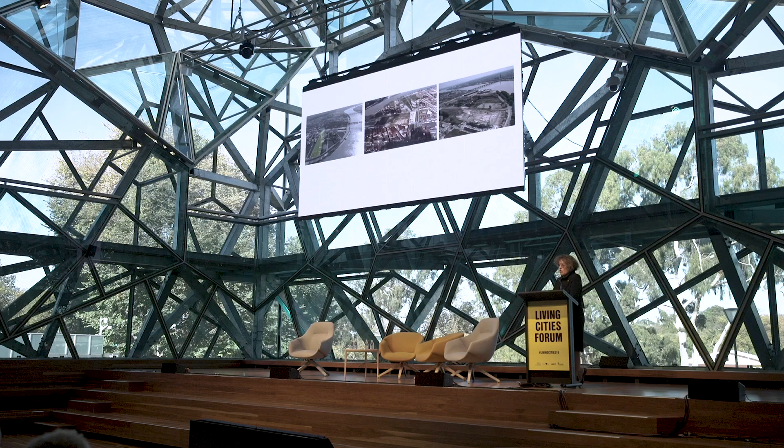A landscape project, studies and construction need approximately 5 to 8 years, so when it's going out, it's just the beginning of being a teenager. I will present 3 examples.

The first one is in Bordeaux, Botanical Garden. It's on the left side of the Garonne, in front of the very famous 18th century facade, UNESCO protected. As you can see, it's a factory district, very poor. It's supposed to be approximately 25 hectares of new urban development.

That's a gap, because scale in landscape is a very important scope. To introduce diversity in a small piece, a kind of pocket for landscape, was a challenge. So the way you bring the elements together authorizes or doesn't authorize what could happen.

10 years later, as I explained, this is the first piece of the urban development. You can see that the way we brought it together in 2 hectares was quite successful, because at the beginning that piece was a basin, and at the end it becomes a lake in the center of the city.

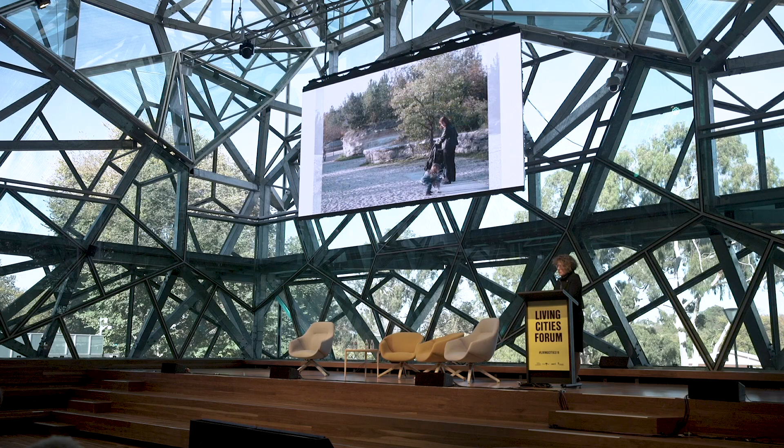Such a proposal is possible because it's a facility. A botanical garden is a facility for learning. I'm not sure you can do that in a regular public space.

It means you have a team of gardeners who explain to the people what happened. At the same time, as a way to organize spaces, it's an opportunity for young students, because on both sides you have campus, university campus, so they can engage with the place and have encounters and specific playgrounds.

So it means it's not only a place for children or just for rest, it's a place to invest in for regular time and everyday life, and even for animals you're not used to seeing in the heart of a city.

The second project is 25 hectares, on the same mine land. Here you see vertical mine pits, meaning the material isn't normally sold. It's a poor material, just made into deposits vertically after the coal mining. So a poor material, but open to air and to light.

The cyanobacteria do the job and introduce plants year by year. And due to the specific situation with sun reflection, you can find here in the north of France Mediterranean vegetation because of that specific reflection of the sun. This was the place chosen to put the new Louvre Museum, a new installation.

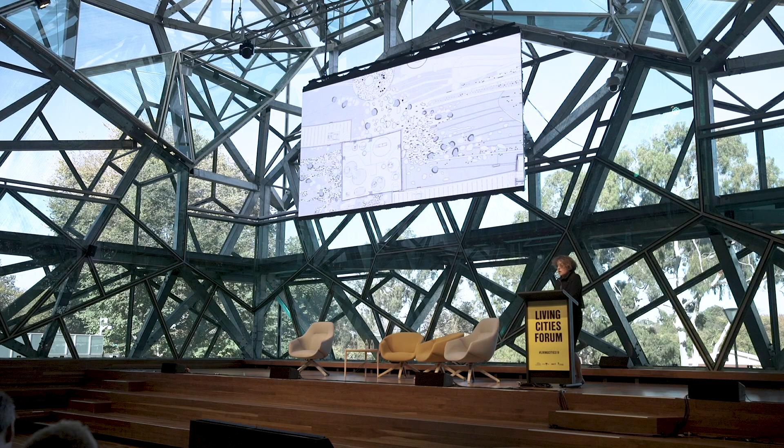So the building was not expected to be the main piece. The building with the park are just a transition, bringing the people from abroad or from the districts through the landscape, through the lobby, to the galleries and to the piece of arts. It means all the system is a traveling system, bringing the visitors through the timeline from environment, architecture, and then the goal from the facility is a piece of art coming from everywhere in the world.

You can see behind the mound of silt, transforming on the earthwork of the limit, that it's 2012 at the opening. You can see, step by step, the cyanobacteria do the job and transform, linked to the air, linked to the humidity, the earth into something vegetal. So just like a regular life on the earth, on our planet Earth.

August 2014, it was very rainy and very hot, and the wall became suddenly a garden, a vertical garden. All that spontaneously, without any seeds, just putting the material in the air and in the humidity.

Under the sun. The second subject is when you have mine exploitation, the underground is very fragile because you have a lot of holes, and it was expected from us that we keep all rainwater on the site. The slope from west to east is approximately 4%, so it was not easy to put the building in the center of the plot and keep the water in place, just to engage the plants' process.

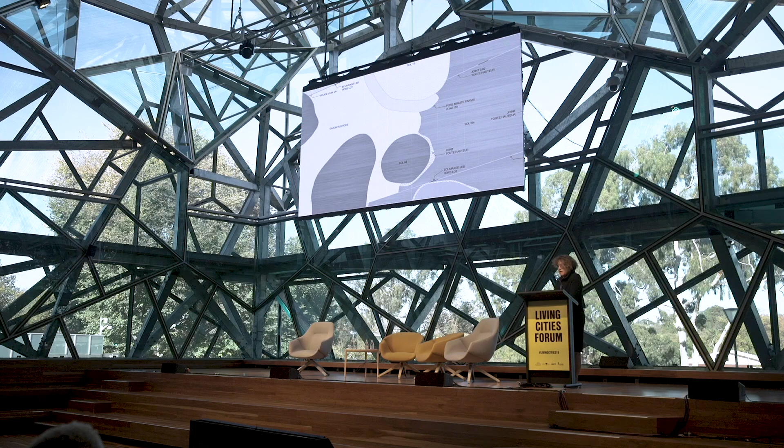So the only way we found to do it is to mix as much as possible mineral and vegetal, to catch the water with holes, to open the soil with holes where the plants work with the cyanobacteria transforming to mosses, and then to larger plants like shrubs and trees. All that is very precisely drawn with detail, linked to the slope work, and especially to the mix between mineral and vegetal.

When you do concrete on the plaza, it's quite poor material, and because concrete is alive and it's moving, you need to make a lot of recessed joints. And it was a way I gave arguments to the engineer, because a lot of engineers said, okay, it's not possible, just prove it. And proving something that doesn't exist is difficult, so you just need to prove it with technology.

And the only way we found to introduce spontaneous vegetation is with a recessed joint, more or less large. So the smallest one is 2 centimeters, 1 centimeter, up to 20 centimeters, the best nest for spontaneous mosses and other annual plants.

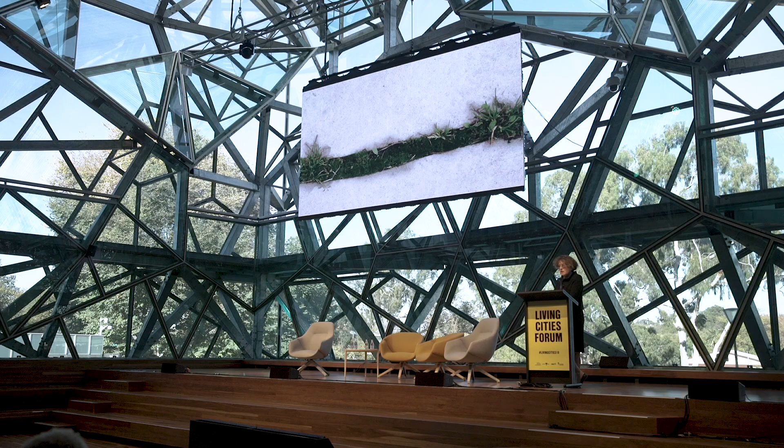So by sure, all that is spontaneous, so it can come or can be different, linked to the seeds, brought by the birds, and linked to the season, more or less rain, more or less heat. And it's a difficult negotiation with the cleaner, because if you use very hard material to clean the concrete, by sure there's no place for life and for spontaneous seeds. So it's a continual negotiation with uses and with life, like everywhere in a city.

That project is very powerful, showing the possible link between architecture, inside and outside. The architects are Japanese, so maybe they are much more trained to have a smooth link. And we worked very delicately together to make just one unique concept for both building and landscape.

One entrance coming from the station. The green canopy used to catch the water and to make protection against bad cars coming in, because it was a very, very important request to protect the building. The facade is fragile, it's glass, aluminum, against attentats.

It was 2005, so what happened further was not expected, but at that time, by sure, we didn't want, with SANAA, to have a lot of plots, because it makes everything very bizarre, much more like a jail. So we used that small earthwork to protect, again, against the bad behavior of attentats, to use that for spontaneous benches, and to catch all rainwater coming with the slope. So 3 functions for one piece of land, and it works quite well because of spontaneous appropriation.

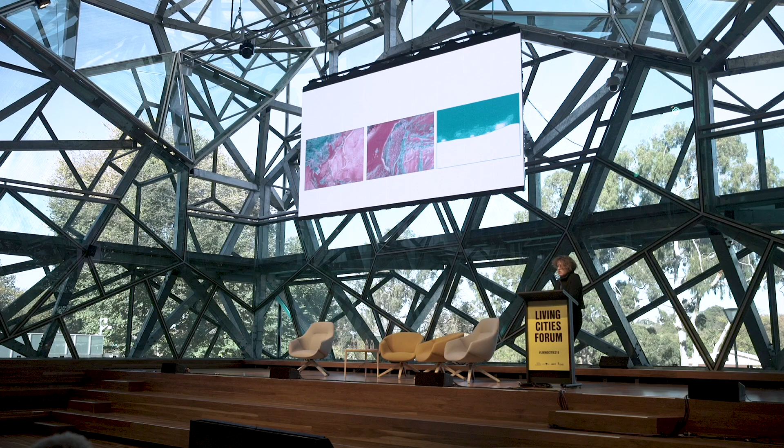Here we are in tropical humid climate. People in that climate are used to spending weekends and holidays in shopping malls, because when you go outside you are immediately uncomfortable. So we were very aware at the competition - we were thinking, okay, the budget for that park is the same as the budget for the Louvre-Lens building and park together. We said, okay, we will spend 70 million euros to make a park, and it's not possible to spend that money and let people just go to the shopping mall because it's too uncomfortable. So the main scope of the project was to find a way to bring people back to Earth and to outdoor life.

To achieve that, we tried to engage design strategy linked to universal scopes, not only linked to fashion in design. An event like heavy raining in a very short day happened just 2 days ago - it happened last year in August, and it was under construction. When such an event happens, everyone is stressed because nobody knows how to react. The park proposes that whatever event happens, it's just regular life because it's changing, and we just need to work with it and deal with it. Design needs to manage all that, whatever it is, if it's hard or low raining. We are on the feet of the mount.

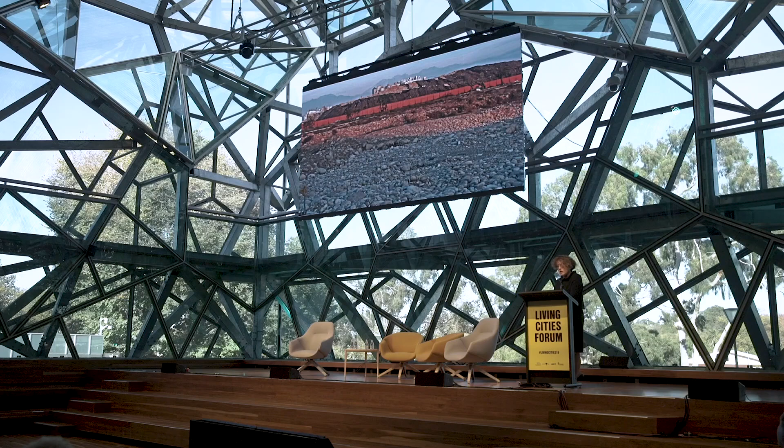It's a volcanic island, so the conditions are very poor - no earth, just pebbles coming from volcanic rocks. That was a site where we demolished the asphalt from the airport area, so stones and pebbles, very good for infiltration but not so much for plants. We plan to reuse all the material on site, not to bring material from all over, just to make nice or fashionable furniture, and to transform all material on site - soil and pebbles - just to keep it in place.

And to engage design linked to the technical requirement to keep all rainwater in place from the total 250 hectares district. Because even if it's raining a lot in Taiwan, as you may know, we are on the feet of the mounts, and before, the mounts were covered by forests, and the economy of wood production demolished mainly the main forest. So it means the runoff of the rain goes directly from the sky to the sea without any infiltration, because there are no trees to hold back the rain with their foliage. So when we did the competition, we studied all the conditions of rain, all the rivers coming from the mountains, bringing the rain from the top of the mountains to the plain, since we are on the feet of the mountains.

We tried to introduce complexity - an interface between mineral and vegetal, and multi-layer drainage - so that the rainwater, with very heavy rain events like monsoons, nourishes the water table on the place. Because if you push the rain away very fast, which is the tradition in tropical humid climates, you lose the capacity to nourish the water table, and in a few generations there's no more safe water. For example, when you go to Taiwan and stay in a hotel, you're told not to drink the water from the tap because you'll get sick.

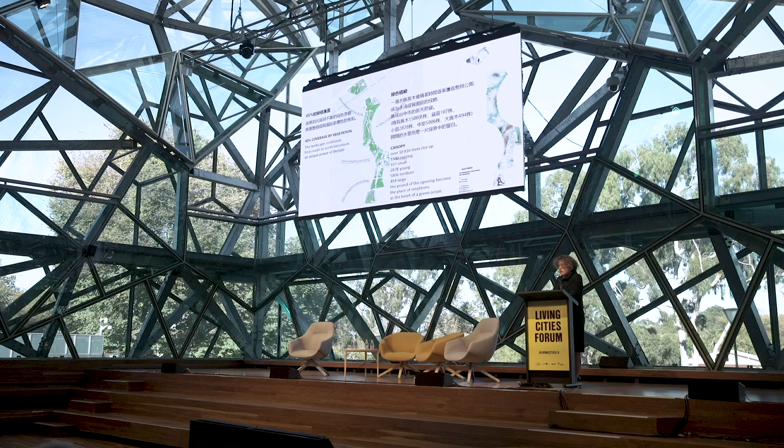So in total, most of the area has more than 10,000 trees, existing and new young trees. And we try to re-engage, even in this tropical humid area, the rhythm of the seasons, so that the park is not only attractive in spring or summer, but attractive the whole year.

Landscape: when we do a competition, it's expected to always prove a final point, but it's never a final point. It's always ongoing, always changing, just like regular life, like your body is always changing. It's very difficult to make that clearly legible for politicians, because they're supposed to explain to the inhabitants what they will have. But what they will have, for example in Lens, comes 20 years after.

In tropical humid climates, it's a bit quicker because plants are very dynamic. So we did important work to go back to the tradition of Chinese mood, meaning each stage has a value and a power, and we need to take care of each stage and the way we bring elements together — it's not only a final point, it's just an in-between. Each in-between is a very interesting stage, and you will never see what you saw one year before.

Two or three years later, you see something totally different. Each stage has its value, and the rendering of the park, the submission, will be finished in 2019. So we are at reception, with no buildings all around yet. It's really the first heart of the city, of the future city. We will take approximately 10 to 20 years, much faster than in Europe.

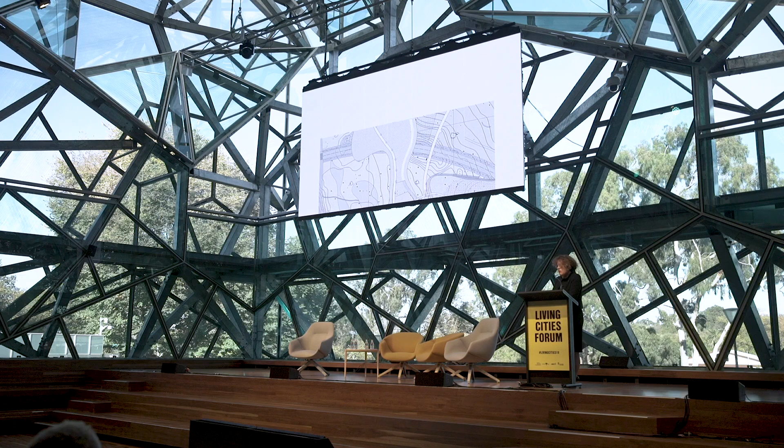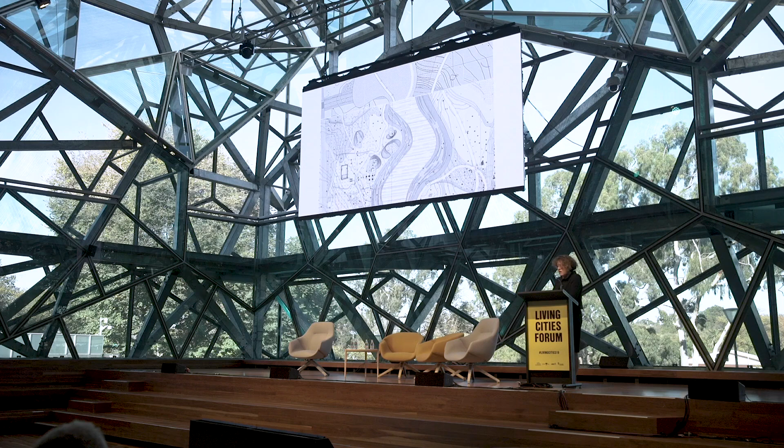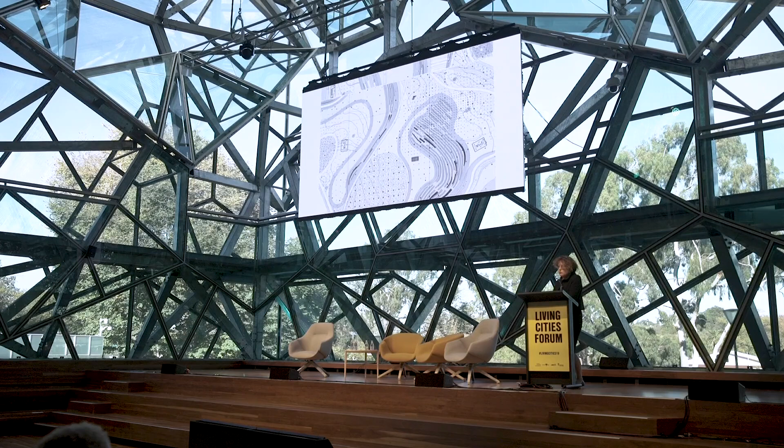To manage all those parameters — water, soil, topography, heat, humidity, and pollution — we need to draw the 70 hectares square meter by square meter. In the middle of the topographic beds, the topography manages all the rainwater. The phytoremediation plants are engaged every 30 centimeters by 30 centimeters. That's very unusual in such a large area, but it was the only way to ensure the scope to protect the whole district against flooding is possible to control.

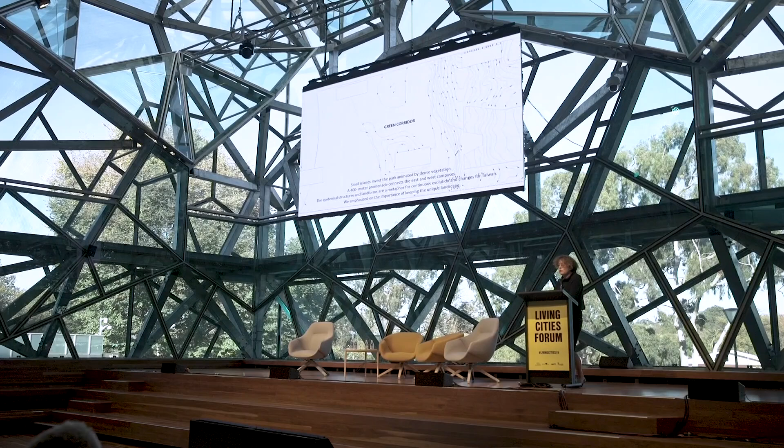To work with the green corridor, a promenade of 400 meters, linking a campus on the west to a technology campus. You can see all those lines are the drainage system, and all the dark points are manholes to ensure maintenance keeps the drainage empty, always working to keep the water and infiltrate it directly into the soil, keeping the soil alive and not just an impermeable, dry area.

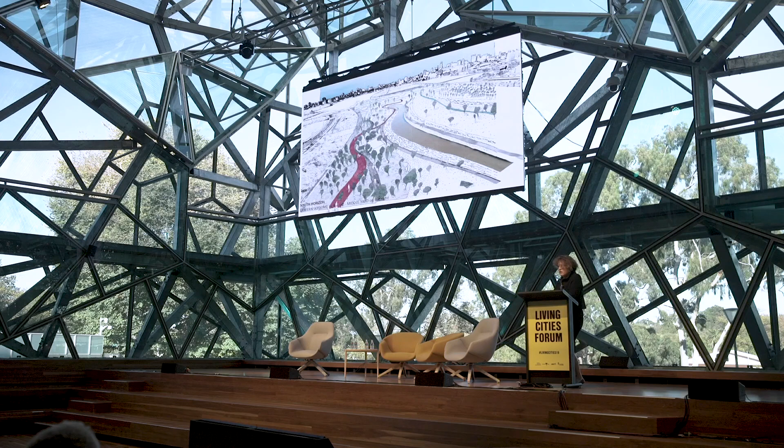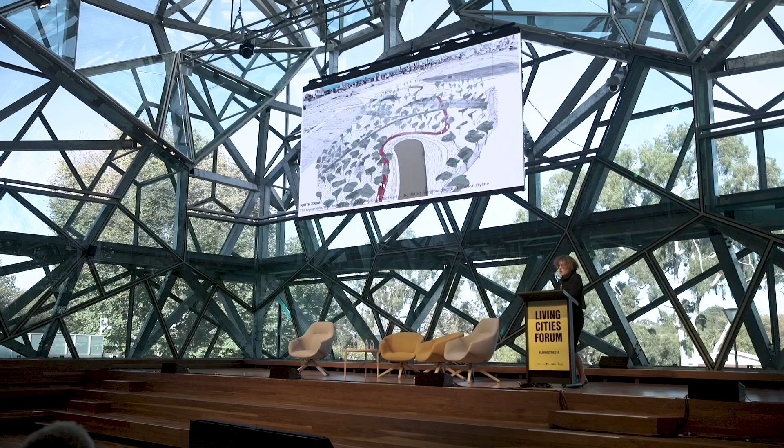I will show a series of drawings to show the different stages we engaged. You see the park is alone without any buildings all around. At the beginning, like now, it's empty and you are in front of soil of different finishes, more or less porous, more or less mineral, more or less vegetal, with very young trees and approximately more than 1,200 year old ficus trees. We are lucky to combine with very young baby trees.

You can see that the perception of the space changes radically. At the beginning it's nude, and when it's growing in 5-7 years, it will be full of canopy, and you will see no more of that earthwork.

So for us, behind is a district. It looks like a very large park on 200 hectares, but in fact it will build up. The thickness of that mound is approximately 12 to 15 meters, which is quite important in absolute terms.

But when you have a 100 meter tower behind, it's just the thickness of a line. You can see the relativity of scale and of the thickness of the elements change radically the way and the place you are and the context you are living nearby. And surely, the appropriation from the inhabitants will change at the same time.

I'll go a little bit faster. It's quite difficult to make it clearly understandable and acceptable by the inhabitants, because when they invest in a new place, they expect to have full services and everything clean, which is just a theoretical position and not really linked to real life.

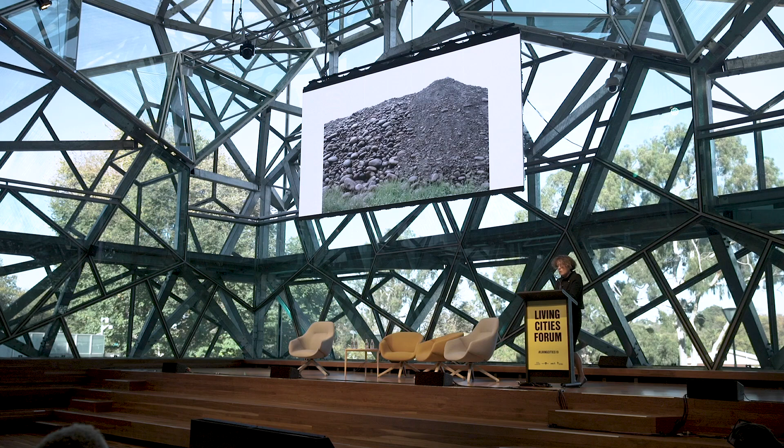But that is one function. It equilibrates the cut and fill from the topographic beds to the positive area. The other function was to create urban places under the mounts to engage different spontaneous appropriation over the traffic roads. So it's not only linked to covering the traffic, but to engaging urban spaces and plazas to make happenings, artistic happenings, music happenings, or parties for the inhabitants.

So you can see, I always like to show what is behind the end of the design, because it's the way you bring the elements together that will authorize or not the openness of the mesh. There are bridges and tunnels for approximately 2 hectares. We are not interested in just making bridges and tunnels. We were interested in engaging comfort and engaging continuity of native landscapes.

In fact, as the size is very large and unusual, when you go inside the places, it's like going into a church, so you feel immediately, without any devices, the difference in coolness from inside to outside. The goal is to keep people outdoor and having rest in a park instead of shopping malls. So it's a very unusual way to draw bridges and tunnels, because it's a landscape way, just to let the system stay open and not make objects floating in the midst of the native landscape.

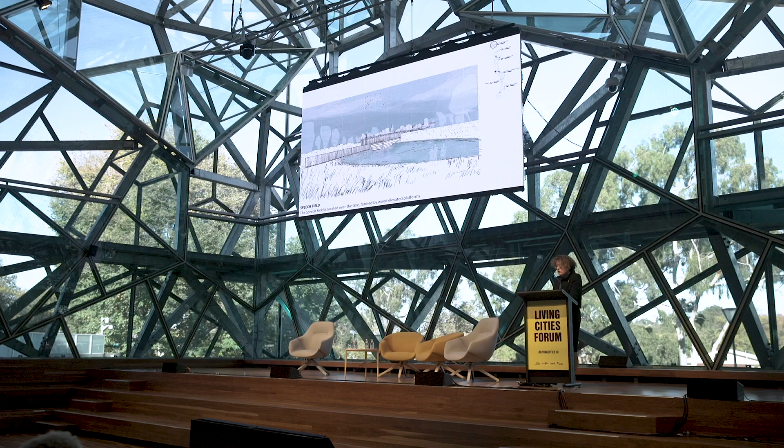I'll go a little bit faster. So that's really to engage a kind of pedagogic relation between the inhabitants and the place, with the highest point, the speech on the highest point of the park, where you can play with the sound reflection.

And again, the different stages of the construction. The taste field is in front of Sana Cultural Center. Because of the 70 hectare park, you need to take rest and you need to take fresh juices or something similar.

The hearing field, on one of the highest points, plays with sound and spontaneous sound between wind and clocks.

The equilibrium, where you play with your body in the emptiness between the canopies, the foliage. The thinking field, linked to a much more spiritual area, cut out just linked to the light and to the earth. So it's really an installation linked to the philosophy of Rudolf Steiner, the vision field.

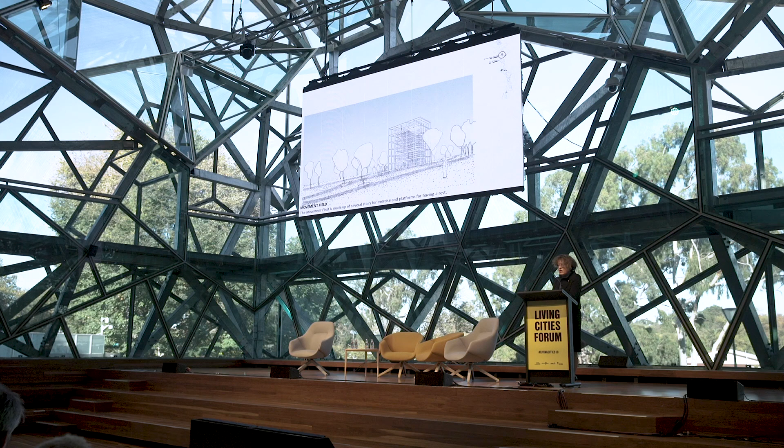And then the everyday life on the regular ground level, the touch field with a different definition of stones. The worms, a much more traditional kiosk to protect against the sun.

Smell field with different smells of flowers used in perfume transformation at that place. And the light field with the three main colors of early morning, midday, and end of day, with Philippe Rahm.

And finally, the visitor center, where you can be in touch with all the different programs of the park and the possibility to engage activities.

So it's very young. At the head of the park, they ask for, the head on the feet, 450 parking plots in front of a convention center. So in general, parking plots are not very positive places.

And we combine that place with autonomous production of energy. On that place, 70 square meters of photovoltaic, which makes the total park autonomous in light production.

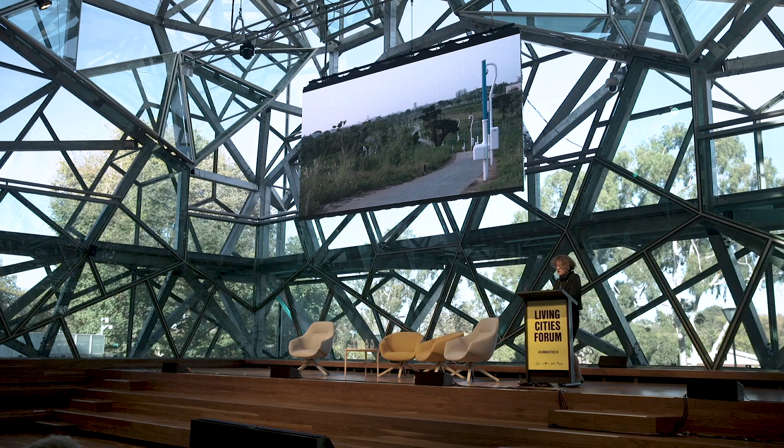The 3 paths crossing the leisure land, the sport land, and the playland are done with different lights, white, blue, and pink, developed by Philippe Rahm's concept. And it happened about a year ago, full of snow, which is really exceptional in Taiwan.

Just to open the discussion further, a small park, a medium park, or a very large park cannot be reduced to one unique concept. It's always, for me, a polysemous way to put together a multi-layer subject, a technical layer.

Even if it's the beginning of the park, it's always updated 20, 30, 40 years later, because it's a bridge, an in-between, and a weaving between many, many subjects, not limited to one main concept. That is the only way for us to let the system open to interpretation and to appropriation.

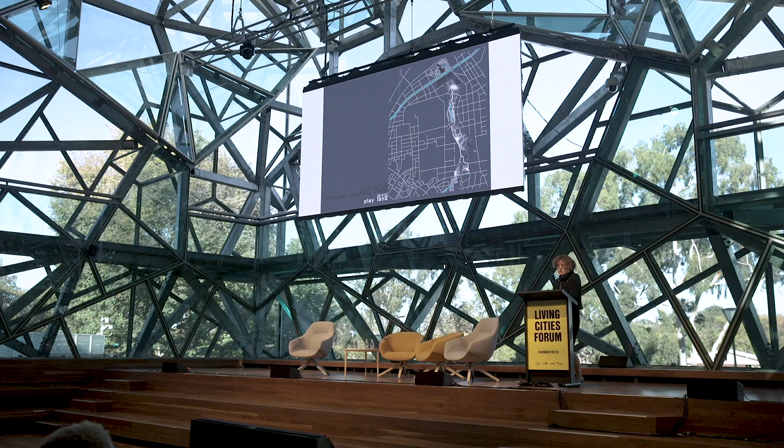We cannot understand today, because we know what happened today, but we cannot imagine what could happen in 20 years, because the traditions and behavior of the people change. And the only gift we think it's possible to give to the further generation is to let the system open for appropriation we cannot imagine today. That's it. Thank you.